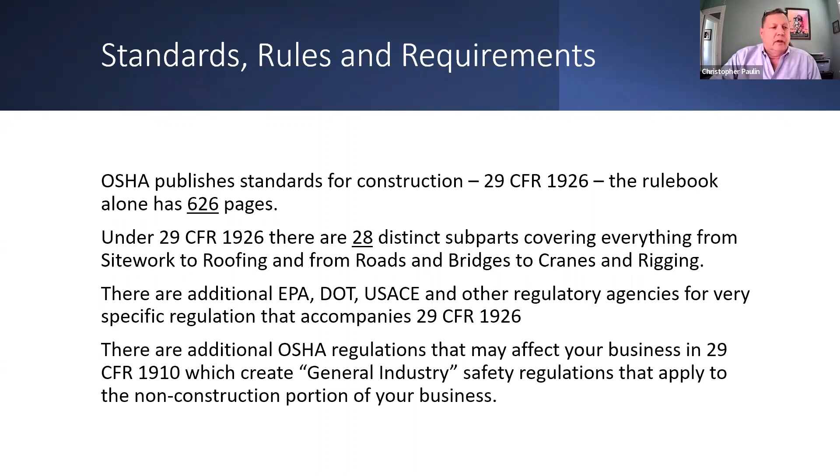Now, we need to do this because A, people die, B, you're required to do it, and C, the law is very detailed. And one of the things that people don't do well enough is document things. Now, it should be an issue to me that should stand apart because I run my own guys too. And I don't want to have to go to somebody and say, they're not coming home. Your family member isn't here.

A lot of the companies I work with have Spanish-speaking crews. And in those Spanish-speaking crews, there's a lot of family members. You find fathers and sons and uncles and cousins, and you've got entire families that work together sometimes. And this is really an important issue for the groups of people that are there.

Statistically, about 1/3 of all fatalities are in construction. I have the exact data for 2020. There were 88 roofers who died in falls in 2020, which is an off year because of COVID, and there were still 1,008 fatalities in the construction business in 2020 when everybody was off and working less than they ordinarily would have.

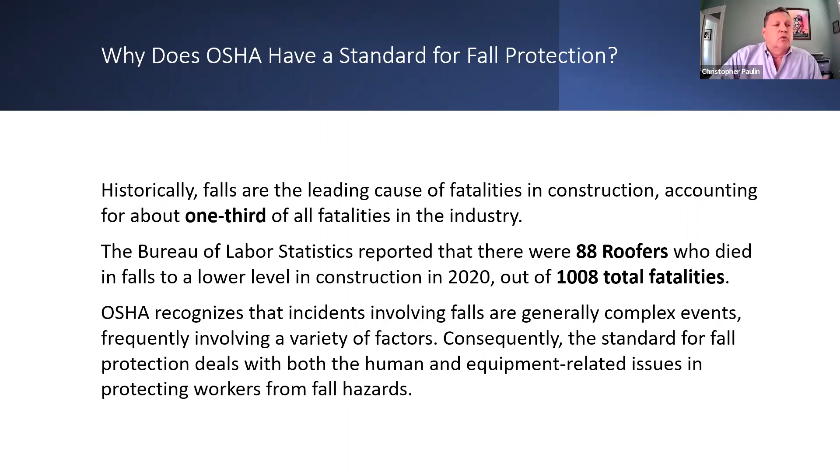Now, you have to keep records about what you do. If you're doing the things you're supposed to do and you're documenting it and something happens, you have an accident. If you're not doing the things that you're supposed to do, you're negligent. If you do it and you don't write it down, you can't prove you did it. And that kind of still makes you sort of negligent, because even though you did it, you can't prove it. And in the eyes of the attorneys and the law, if you didn't write it down, it didn't happen. So documenting things is a huge deal.

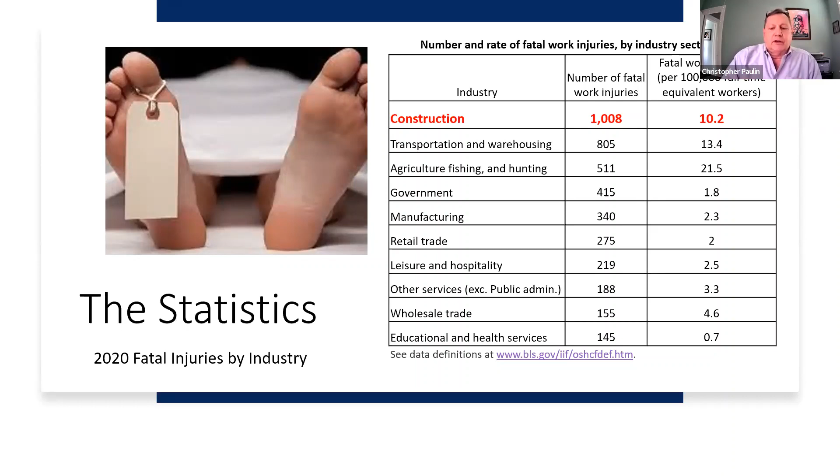Now, again, statistically, we end up with a lot of people that get hurt percentage-wise. What you see here is fatality statistics, but of all the different kinds of trades, fishermen and hunters and logging workers get hurt more than roofers. Everybody else comes after us. We have the third highest trade of all different individual trades: carpenters, farmers, miners, guys that work in road crew, you name it, police. Our guys get killed more often than anybody else.

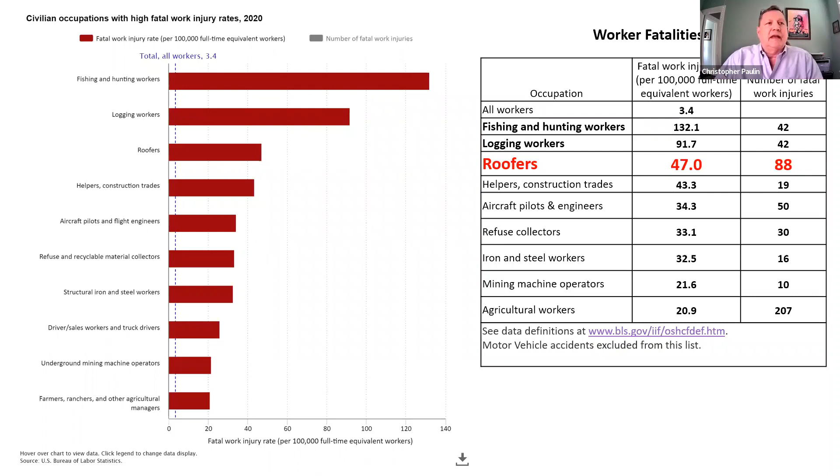I'll spend about another 2 minutes on what's most frequently cited here, and those are fall protection citations. This is from 2020 through September 2021. The number one thing that gets cited of all the things is duty to have fall protection.

That duty to have fall protection means they didn't have anything, okay? It's not like they were using it wrong or improperly. They didn't have anything at all. And you have $28 million worth of fines being issued. This is all construction industry. 1926-0501 is a construction general duty standard, okay? And everything you see here, 1926, is something that's happened in construction.

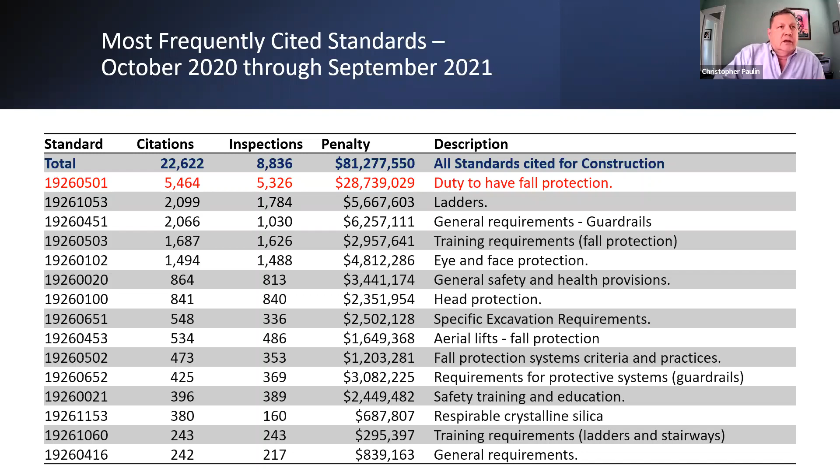So as you go down this list, and I can make the full list available to you, you find some things are general industry, but they've got some construction work in them. This is strictly construction, and this right here is the top 15 most frequently cited things, okay? You got fall protection and training in 4 of the top 15 items.

Now, subpart M applies to everything except for one thing, and that's the inspection and supervision part of our jobs. I will tell you, in 42 years, the only time I fell through a roof, I was doing a takeoff. It was a brand new job. I have seen other guys fall a couple of times in 42 years. It doesn't happen a lot, but it happens. I would tell you that just because somebody's exempt doesn't mean we shouldn't be careful about what they do, okay?

When I fell through, I only fell halfway. I stepped through the roof and I ended up to my waist. But if that roof had been compromised any more, I probably would have gone all the way through. I was lucky. So just because somebody's exempt doesn't mean we don't have to take care of them.

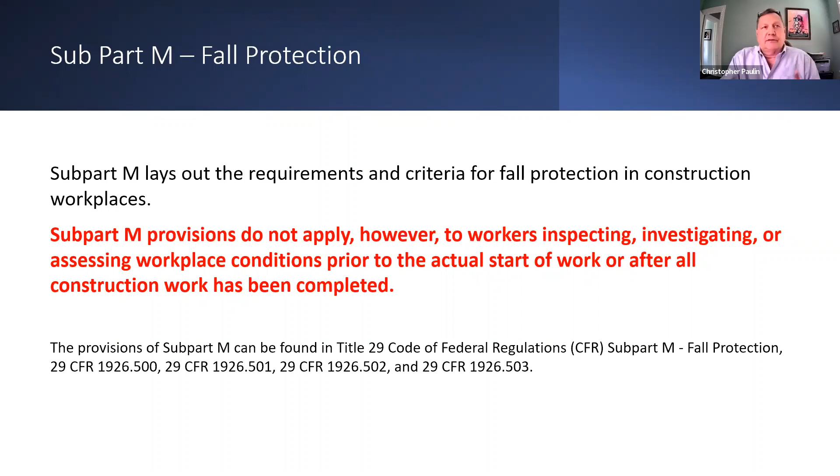Now, employers have to provide fall protection when there's any possibility of a worker falling more than 6 feet. There are other times as well when it's less than 6 feet: if you're over dangerous equipment, a fall to a lower level, or a fall on the same level. If we have a slippery surface and you fall and you land on the surface you're walking on, it's still a fall.

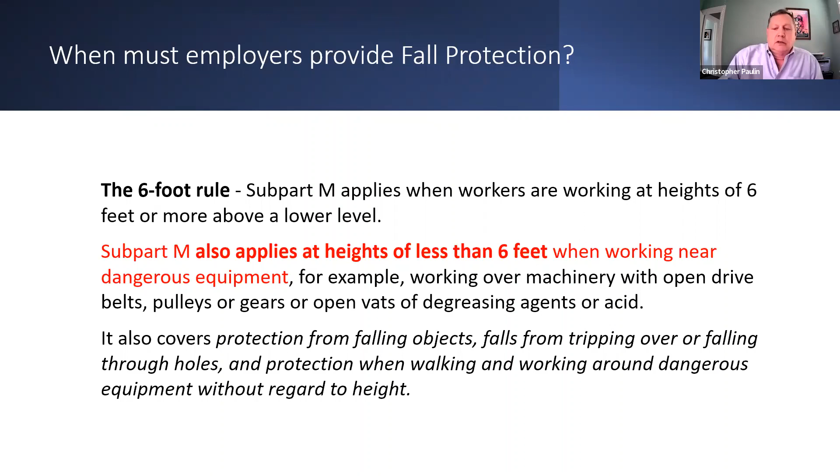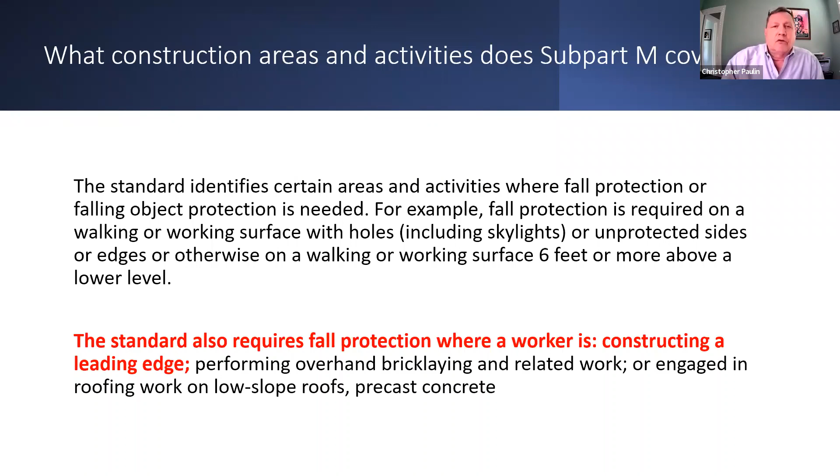Now, leading edge work seems to be the thing that most people focus on. I know that when we talk about safety as a roofer, everybody thinks about the leading edge. What I want to do is spend a few minutes talking about the stuff that we don't really talk about that we should. First, you've got these types of falls: falls from the same level, and falls at an elevation.

When a person falls, they lose their balance. The body unintentionally moves from upright to horizontal. The free fall velocity when somebody falls 12 feet is equal to that of 20 miles an hour. And a person hits the ground in less than 1 second from 12 feet of distance. You fall 12 feet in less than a second, and realistically, you don't even have time to react.

So falls are dangerous because when you look at the total distance that a person is going to fall, or a person is going to get rescued by fall prevention equipment, there's still an impact associated with the fall. Even a person that's caught by a harness like this still receives the impact of the harness hitting his body.

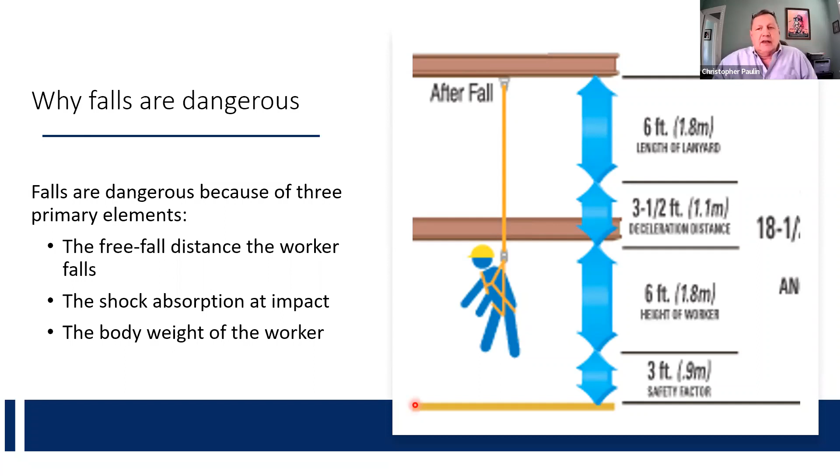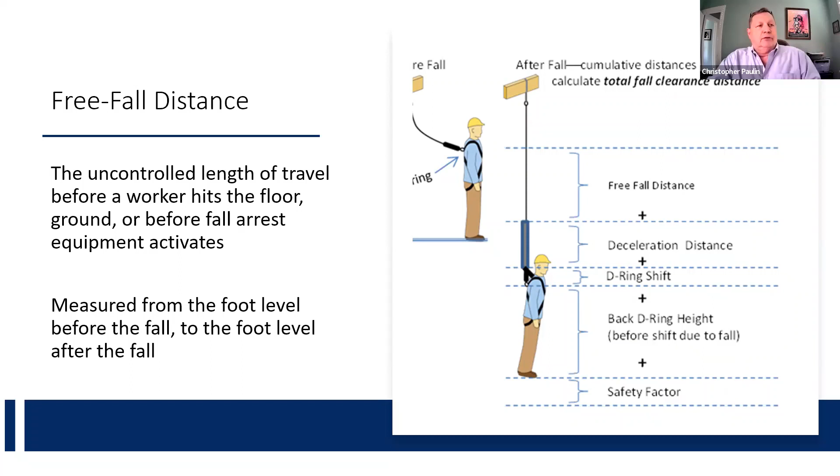Now, the first thing is when we think about falls, we need to think about the distance that somebody's going to fall. This is always measured from foot level before the fall to foot level after the fall. You're not allowed to fall more than 6 feet, and really, 6 feet can kill you.

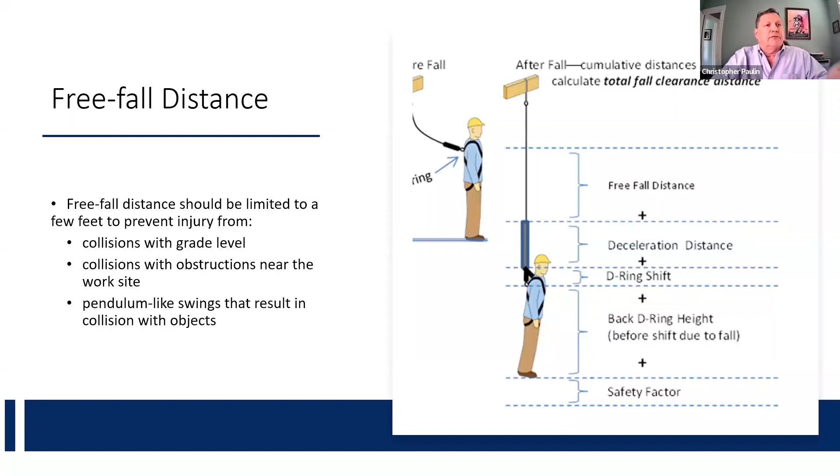A lot of people that die in falls die from falls at lower levels, not 30, 40, 50 feet in the air. They die from falls off of ladders. So it's not just leading edge work. You can fall off of or through a lot of different things.

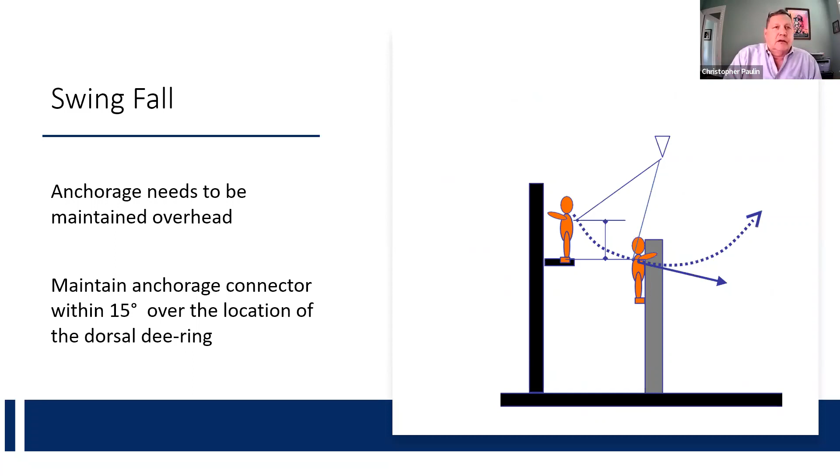And the other part to be aware of is swing fall. When you go over something, you can go straight down and have plenty of room. But if you swing or oscillate from side to side and you hit the wall or hit a beam or something else, you hit that just as hard as if you had hit the ground. So we look at shock absorption at impact.

One of the things that I do see is that anchorages, lanyards, and harnesses are not always fit correctly. The harness is too loose, the D-ring's in the wrong spot, the anchor is in the wrong place, and the guy can fall more than 6 feet before his fall is arrested.

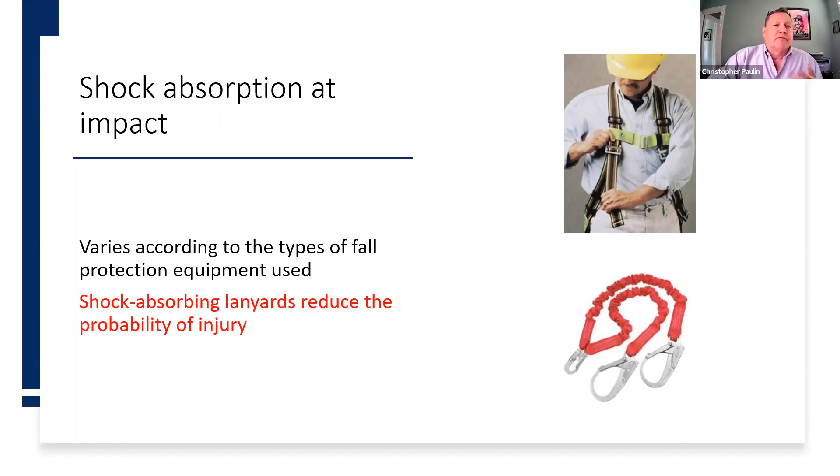And the most important and frequent thing is this: the body weight of the worker. The bigger they are, the harder they fall. And the bigger they are, the harder it is to get a harness that fits them, because you can't go buy compliance in a can and get a harness that fits a real big guy.

And if they're wearing an overcoat or something, clothing for colder weather, all that stuff has to be taken into account.

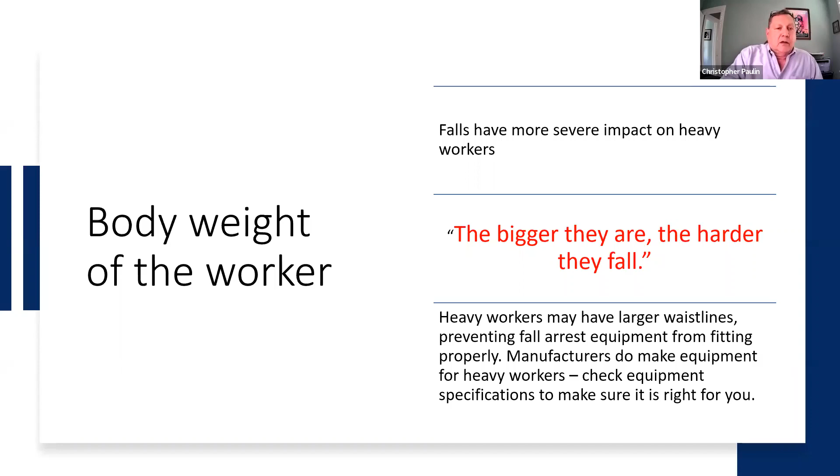But the single most important thing that I deal with, with companies that I run into, that I work for, that I interact with, is this: fallen worker rescue. The employer shall provide for prompt rescue of employees in the event of a fall, or shall assure that employees are able to rescue themselves. That's one of the standards. So you have to be able to create a plan that permits you to rescue a guy in really 5 minutes or less.

I'm going to explain this part, because usually I talk about this towards the end of these presentations, but we only have an hour here. So I've rearranged this part to put it towards the beginning, because I don't think it gets enough emphasis.

Everybody knows you got to have a fall protection plan. We all know you got to put up a warning line, have a safety monitor, wear the harness, put up a guardrail. We all know this. If we don't do it, shame on us because we know this. Every time I do a fall prevention class, I have to make sure that I dedicate enough time to this part of what happens after a fall.

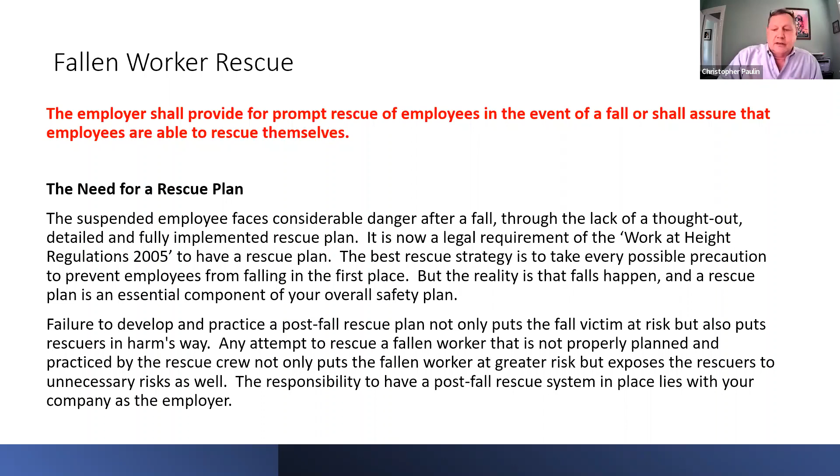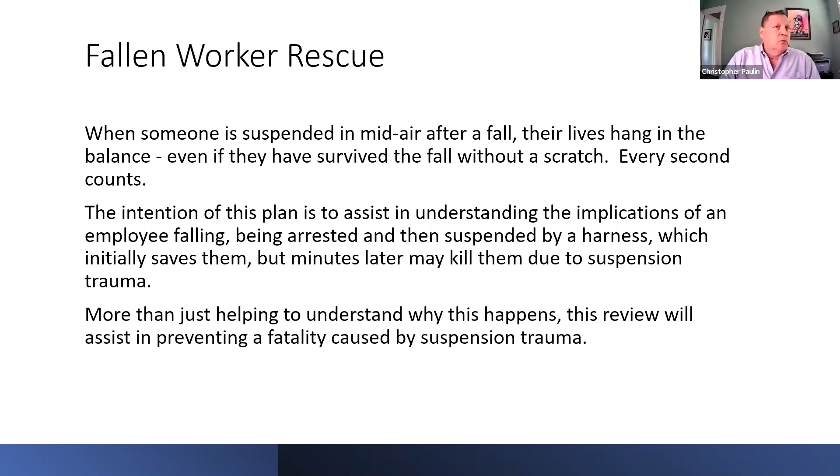If you've got a guy that falls off a roof and he's wearing a harness, he's only got a short period of time before he gets seriously injured. When someone is suspended in midair, the harness restricts the flow of blood in their body. The intention of creating a fallen worker rescue plan is to make sure you can get the guy out of the harness and onto the ground in a reasonable amount of time, which means about 5 minutes.

When we look at fallen worker rescue, there are critical phases: before the fall, when the fall is actually arrested, the suspension part of the guy hanging there, and then the rescue part of the rest of us getting him out of the harness and onto the ground.

Before the fall, what can you do to prevent a fall-related accident? If you've got your guys in harnesses, you can almost always rig those harnesses, that system, for fall restraint rather than fall arrest. You don't have to let them go over the edge, and there's really no reason to do that. Now, there may be instances where you can't find an anchor for the lifeline that permits you to rig fall restraint and reach everything you need to reach. If that's the case, then we need to look for other kinds of anchors, or we have to consider what happens if the guy falls.

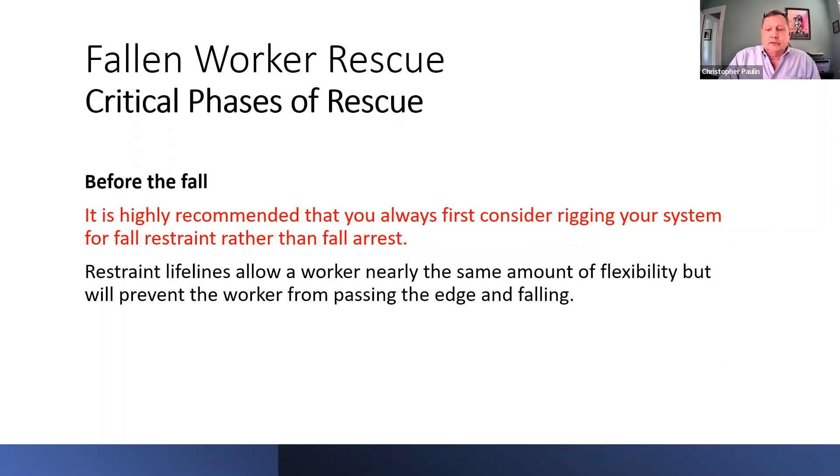A restraint lifeline is infinitely better than a fall arrest lifeline, because the things that happen when a guy falls are surprisingly serious. The whole concept of fall protection is that if you do fall, the system is going to stop you. How that happens really depends upon the way the harness fits, where the attachment point to the harness, to the lanyard and the lifeline is relative to your body. If your harness is too loose and the attachment point is down low in the middle of your back, you can get seriously hurt because of that.

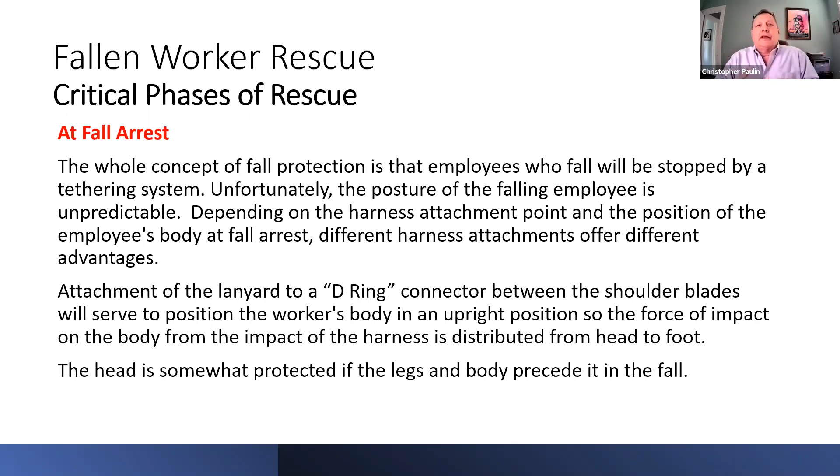And we see guys loosen up their harnesses because it's hot, it's a little uncomfortable to work with. They just have to get used to it if they're going to wear a harness. And where the anchor point actually is matters, because if you're moving along the leading edge of a roof, your position relative to your anchor will determine how much you're able to fall in free fall if you're not very careful about the positioning of your anchor and the length of your lifeline.

Now, the second and most critical issue here is suspension. We assume that when somebody falls and that fall is arrested, you've just saved the guy's life. And realistically, that's not necessarily the case, and we're going to explain why. If you can't get that guy out of the harness, then that guy will suffer what's called suspension trauma. We'll talk about suspension trauma in a minute here, but fall victims have to be aware that they need to do some things if they're hanging there in the harness.

One of the things they need to do if they're hanging in the harness is keep their legs moving. Nobody tells them that. I don't know how many fall classes I taught before I figured out I was supposed to start telling people some of these additional things, like what happens after you fall. I got relied on to say, this is the rule, always keep your harness on, make sure you're anchored. That was the emphasis. And really the emphasis needs to be equally on this part as well.

If a guy falls and he's hanging there in a harness, he has to keep his legs moving. Because if he doesn't keep his legs moving, blood will pool into his legs and not get up to his head. And that's what they call suspension trauma.

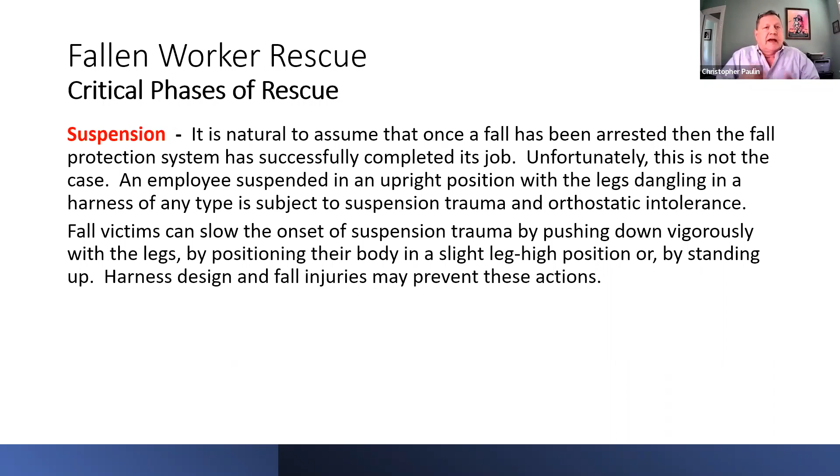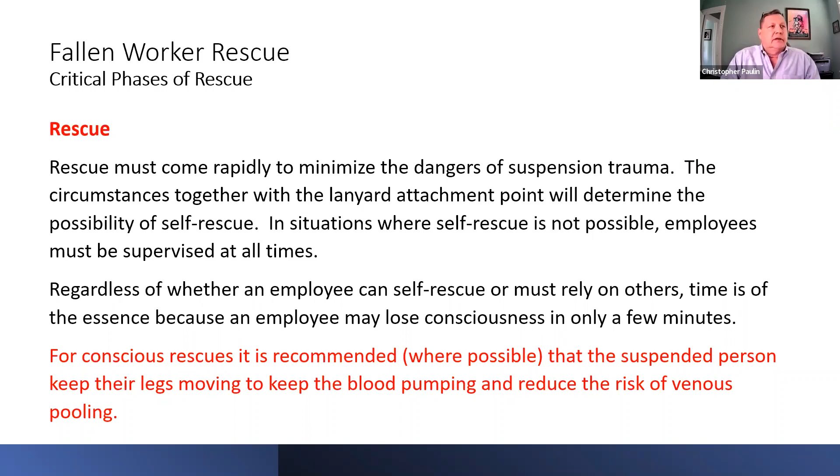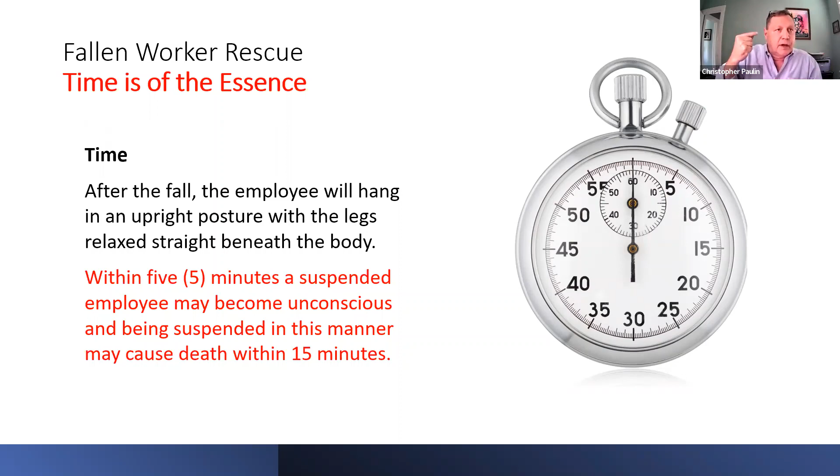Now, the last phase is the rescue phase. It has to come quick enough, because if a guy can't rescue himself, this suspension trauma is going to begin to affect him. Time is of the essence for this. When an employee is suspended, he can lose consciousness in about 5 or 6 minutes. And if he loses consciousness, he can die within 15 because of lack of blood to the brain. That's called orthostatic intolerance.

Most of the guys, and this is from an OSHA publication, most of the guys that use harnesses are unaware of what suspension trauma is. Some guys know. Most of the guys in bigger companies with safety departments that pay attention, guys like you, will tell your folks about suspension trauma. But you also have to tell them things like, you've got to keep your legs moving.

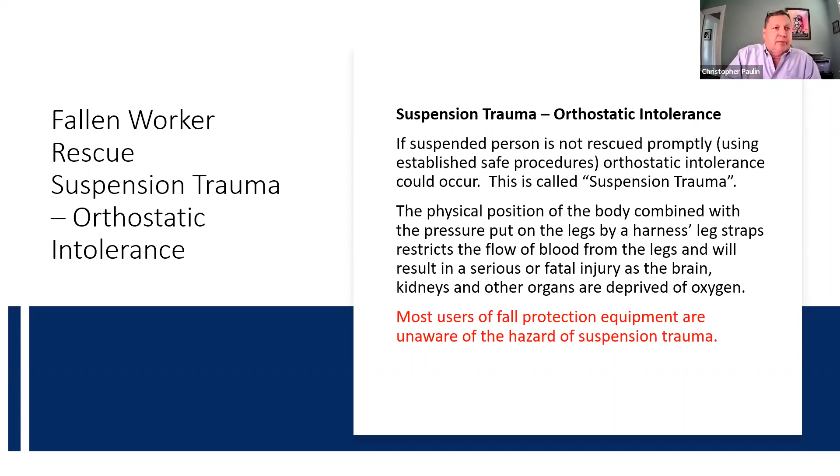When you're hanging in a harness, that harness is putting pressure on the legs across your femoral artery, and it's preventing blood from returning to the level of your heart and circulating up to your brain and back around. Orthostatic intolerance is really the technical name for the part of this fall that's going to kill you. If you don't die on impact, you can still die from lack of blood to the brain.

Now, the way it happens is this, it's called venous pooling. Blood will collect in the legs, not make it back up to the brain. And when that happens, it causes a person to faint. Now, if you were not in a harness, you would fall over. And your blood would be able to circulate back to your head because you would be horizontal, not vertical.

But the problem is when you're in a harness, the harness holds you vertically. It keeps you from falling over. And when you can't fall over, the blood doesn't circulate back up to your brain. So this venous pooling part is hugely important, because once a guy is passed out, there's nothing he can do to help himself. He's going to stay passed out until somebody gets him down and out of the harness, and he's only got about 5 minutes before that happens.

People don't believe this, but I have not read any piece of literature that says anything different. They all say the same thing. Whatever study there is, it refers to a time limit maximum of 5 or 6 minutes. After that, you've got to pretty much consider the person useless. He won't be able to help rescue himself, and you need to make sure it's a fully assisted rescue.

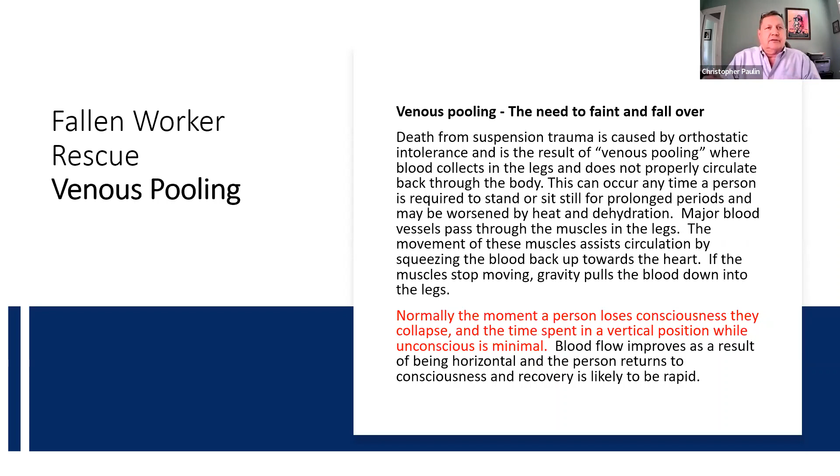If he's fallen over, passed out, he's going to be hanging there, there's no self-rescue associated with it. There are self-rescue and aided rescue things that a guy can do. I have not fallen 6 feet, and I have not physically hit a harness like that myself. So I don't know what it feels like. But I can imagine...

That when you say to a guy, you've fallen 6 feet, now get yourself back up on the roof, that might be okay for a guy that's 20 years old. If you're looking at a guy that's 45 or 50 years old, that's going to be an issue no matter what. I was in pretty good shape 15, 20 years ago, and I still think I would have had a hard time trying to climb back up onto the roof. Because that self-rescue part is either you climb up a rescue ladder or you climb down a rescue ladder. Really, how's that going to happen?

The older you are, the harder it's going to get. The bigger you are, the harder the impact. It just so happens that getting older and getting bigger are two things that happen together quite a lot. I happen to be much larger now than I was 20, 25 years ago.

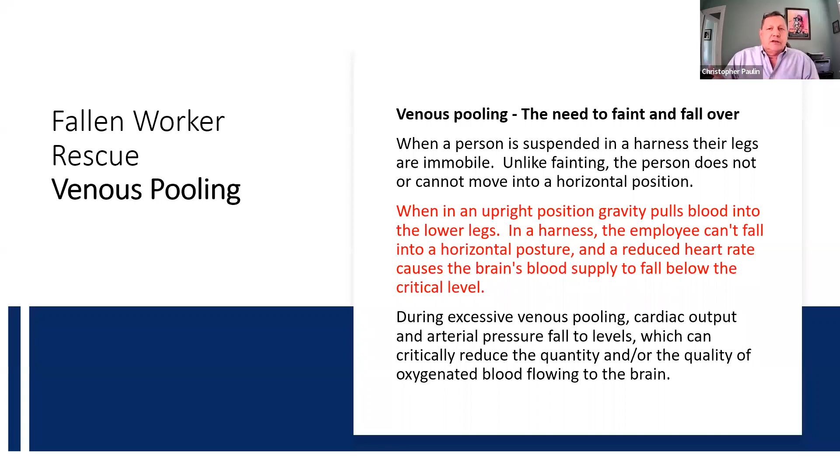Because your body changes, your musculature changes, your ability to resist things, your heart, all that stuff, it all changes. Now, venous pooling is an issue. There's three things that aggravate the problem. One, the employee's suspended upright. He can't fall over, the blood won't go back to his head. The second thing is the safety harness straps exert pressure on the femoral arteries by compressing them and reducing the blood flow back to the heart. And then the third part is the harness keeps you upright.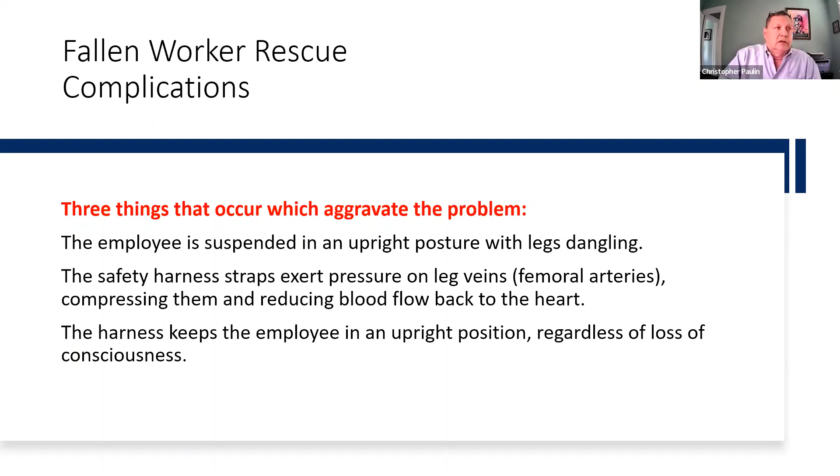So if you can't recover from this, you can't recover at all. Now, there are some recommended practices here. OSHA recommends you rescue suspended workers as quickly as possible. There's only going to be one way that happens. You have to have a plan, and your people have to know what to do. And that generally requires some practice.

Now, I do safety work for the Army Corps of Engineers. I'm an SSHO, Site Safety and Health Officer. You have to demonstrate on occasion to their safety officers that you have these systems and that your people know how to use them. So the plan has to be in writing, the people have to know what their individual jobs are. Like who goes over to get the safety pole to grab the guy's D-ring, who goes to try and find the bucket lift truck or whatever it is that you're going to use, whatever your plan has to be.

You can't just make this up. If a guy falls off the roof and the rest of your crew's up there thinking, well, now what are we going to do? That's a first-class problem. Especially if the one guy that falls over the edge of the roof is the one guy on a roof with a brain. If he's the man in charge, and the man in charge is the one that's hanging over the edge of the roof, then the rest of the guys need to know what to do. They need to know where the equipment is, who's going to be responsible for what, who's going to go call 911, all those things.

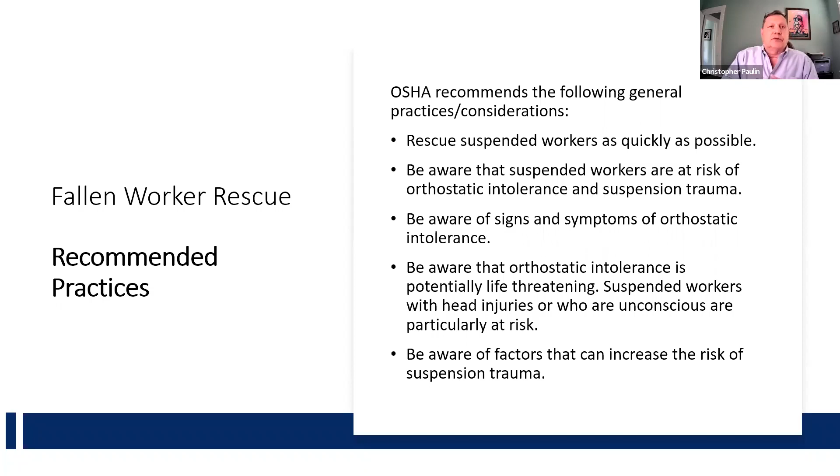Guys don't realize it. The next thing they need to do is lift his legs. So there's this basic instruction part that has to come along with every fallen worker rescue plan that tells the guys that are in the field working what they have to do if somebody falls. And that first aid part is probably the most important thing. If they don't know what they're supposed to do, there's no way that it's going to get done.

Now, if self-rescue is impossible, this is important. Procedure number 1 is the guy that's hanging there has to pump his legs frequently to try and keep the muscles and the blood flowing. If you got one of those little step straps that you can step in, you still need to keep your legs moving to keep your blood flowing. And somebody got to be on the roof yelling at him, telling him to keep doing it. If the guy hits his head on the way down when he falls, he might not be able to do that at all. So you have to be able to help the guy from the roof, not just physically, but mentally as well.

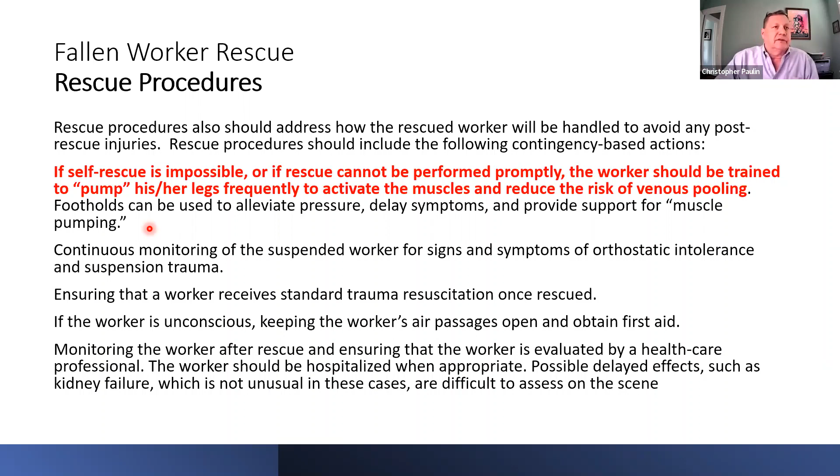Now, if the worker's unconscious, you want to make sure that you get his airway open, that you've called 911. That should be somebody's job right off the bat. That you get his legs moving and you try and make sure that he stays alive until a rescuer gets there. There's 4 types of rescue. There's self-rescue.

There's mechanically aided assisted rescue, where they either haul you up or let you down. Then there's mechanically aided rescue for an unconscious victim. And then there's the kind of rescue which is also assisted, where you'd be able to use an aerial lift of some type.

The assisted rescue methods, number 2 and number 3, are probably more consistently available on projects. But if you're going to use a system like a leading edge Raptor cart or a Cobra cart, it's got a cable winch system that you would attach to the guy and haul him up or let him down. You've got to get that extra snap hook onto the D-ring of his harness.

So there's a whole process there that requires a little bit of practice, because it's not the easiest thing to do. To set up that rescue system, people have to know how to use it, how to connect it correctly, and how to make it work. They bring them up, they bring them down. And if you're trying to bring them up, it's a hand winch, so it's not the easiest thing to do.

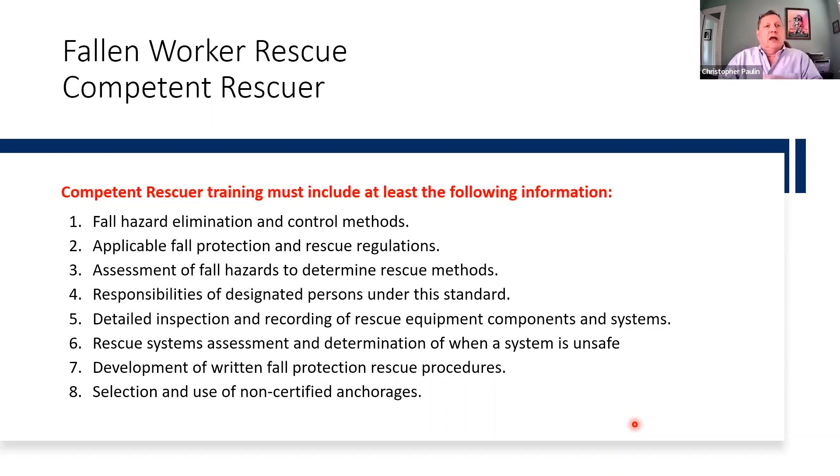If you don't have a qualified person available, a competent person needs to select and use a non-certified anchor. A regular competent man for fall prevention isn't qualified to put up an anchor. I actually have this a little further on with the specific standards that reference it. So somebody's got to select an anchor, somebody's got to select the way to hook the guys that are going to rescue them, and then you've got to have this entire plan to get the person onto the ground.

The competent person has to be qualified in controlled access zones, guardrails, personal fall arrest systems, safety nets, warning lines, safety monitoring, any system that's going to be used. So the rescuer has to be as competent, really, as a competent man for fall prevention. A competent person for fall prevention that's not trained in rescue isn't qualified to rescue people.

They have to have the training. If they don't have the training, they're fine to set the systems up, but you need the person properly prepared to make the correct choices if somebody falls.

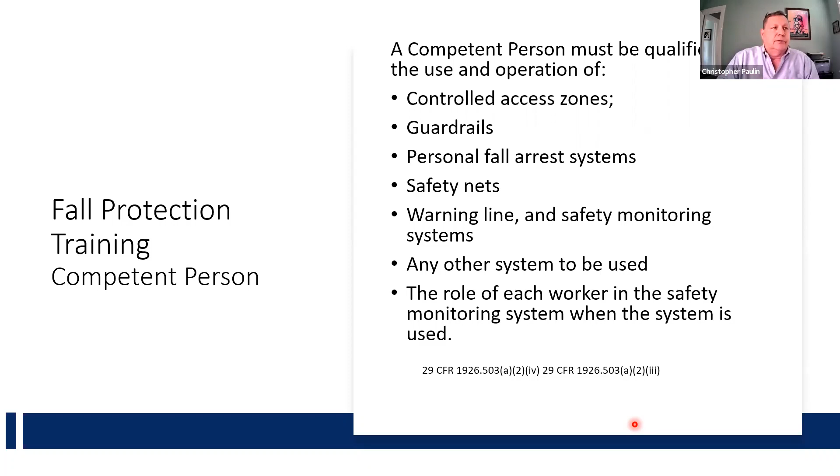Now, you have to train competent people. You also have to train roofing workers, okay? There is training requirements for fall protection systems. Each person needs to be trained by a competent person.

That means, I've even heard attorneys say, well, the employer can just say this person's a competent person. I know my attorney says you better have something in writing to back that up, okay? And that's a big deal, because you can't just go say, okay, my foreman's a competent person. He's been doing this for 20 years. What kind of training has he had? Does he know all these different kinds of anchorages and conditions, et cetera? All the irregularities and the variations in the rules. I mean, there's a lot of stuff to know as a competent person.

All training of individuals on a roof needs to be done by somebody who's qualified. I would tell you that when I became an OSHA instructor, I passed a 500 level class. That did not qualify me to be a competent person for fall prevention.

I had to take extra training, and I've worked with fall equipment for over a decade. I worked for a company that manufactured it as well, the Panther Equipment Company out of Missouri. They had fall protection carts, guardrail, all that stuff. And I've worked with this. I've been factory trained with things. And I still had to take an extra class to qualify me to do this.

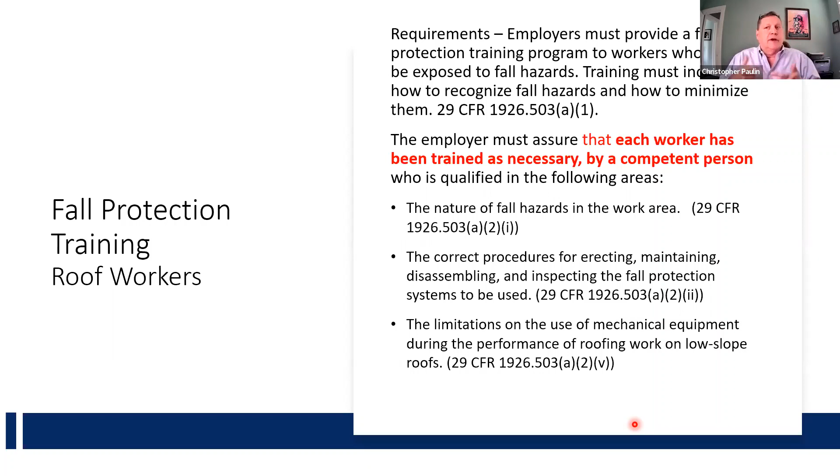Retraining, obviously, occurs when the systems change or somebody demonstrates that they don't understand what they should be doing.

Now, I guess if falls don't happen every day, how does somebody show evidence to you that they need to be trained in rescue? I guess that only happens after somebody falls and the rescuer fails to rescue them. So fallen worker rescue training ought to be something that's scheduled once every 12 months. Every new guy that comes into the company ought to go through, once annual training of, how the rescue equipment works and what they're supposed to do.

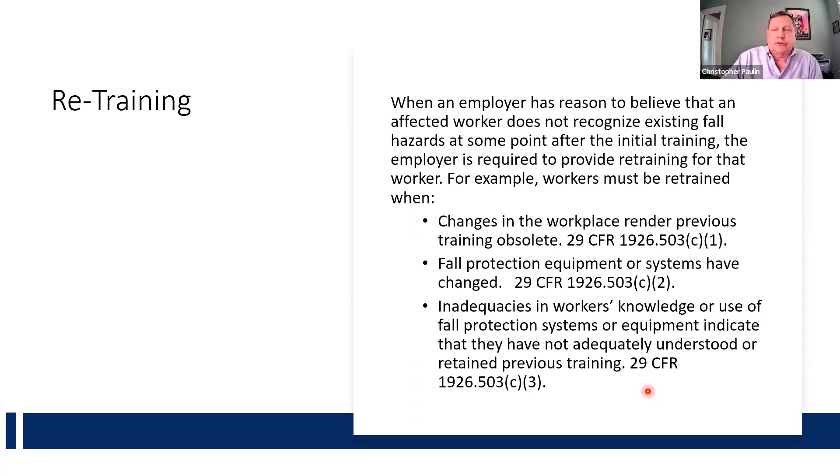All training must be verified, okay? You have to keep a written record of training. 29 CFR 1926.503 says verification of training. That applies to everybody. It's not just that they got fall prevention awareness training. If you have a competent man, you have to document what makes him a competent man.

I swear to God, okay? We get people that don't seem to understand, yeah, an employer can designate a competent person, but he's got to have the paperwork to support it.

Now, there's a lot of different fall prevention standards. Are there any questions about the need for fallen worker rescue programs? Okay.

Usually I talk about fall prevention standards before I talk about fallen worker rescue, but I know we're going to be time limited and I really only have like 15 minutes, so I want to go through a couple of quick things.

An employer has a responsibility. The first thing he is responsible for is making sure the roof deck is strong enough to support not just the people on it, but the weight of all the materials he's going to put on there. If you're tearing off and piling stuff on one side of the roof, you're talking about the maximum weight, live load, not dead load, that you're putting on the structure. So you have to do some kind of evaluation, and you have to document this.

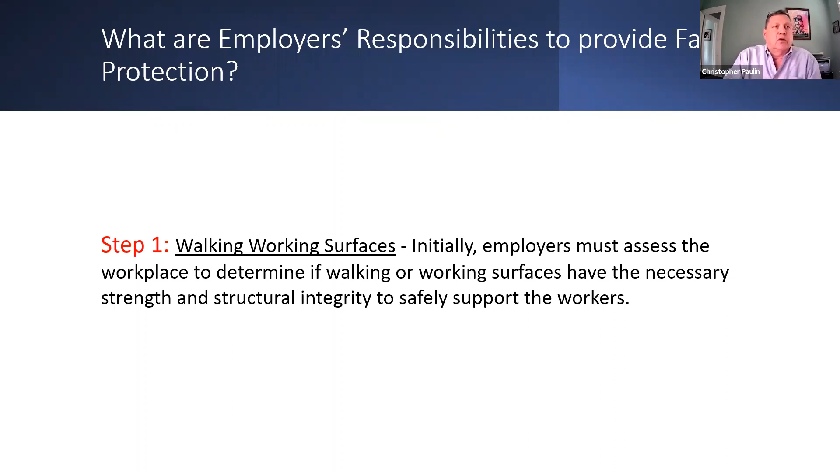You walk through the building on the underside, look at the deck, and say the deck looks like it's in good condition. From the underside, you need to core cut and make sure it's not totally rotten from the top down. That way you can say you've verified the walking working surfaces appear to be in good condition. That doesn't mean you won't make a mistake, or there's not a little rust spot on one side where you didn't cut. You can only do so many core cuts on a roof, right? But you do have to make some kind of effort with respect to due diligence.

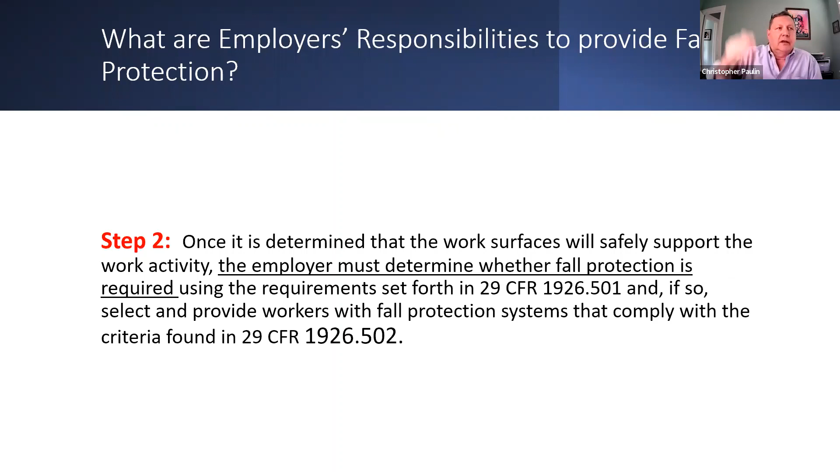Once you've determined the deck is safe to walk on, the employer must determine whether fall protection is required. That's the whole decision tree about what you're going to do. What kind of fall prevention systems should you use? Most of us default directly to a warning line and a safety monitor. Why? Because it's the least expensive.

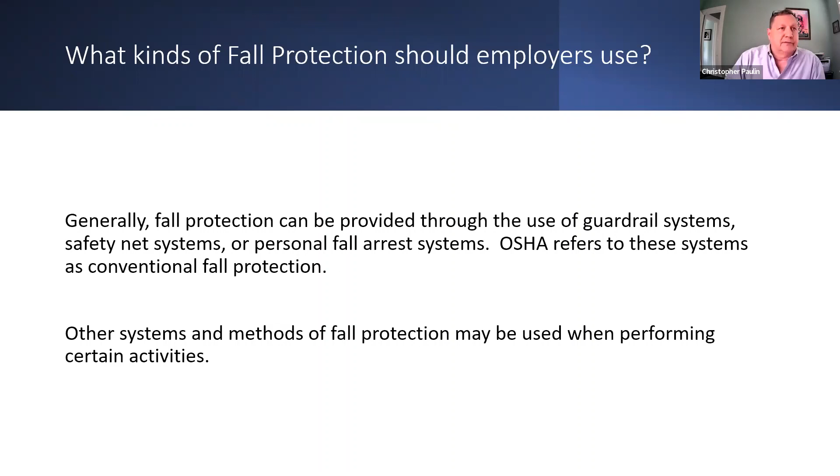Really what you need to do is for each project, have a fall protection plan prepared by a qualified person and developed specifically for each site. Now that's a regulation, one of the standards: 29 CFR 1926.502(k)(1). It says exactly that, copied and pasted. A fall protection plan must be prepared by a qualified person. Basically that's somebody who can do the mathematics and knows all the things they're supposed to know about the structures of the building to make sure the anchorages are correct.

If you default to a warning line just because that's what you always do, then 97, 98% of the time that's going to be just fine. It's that small percentage of the time where it's not really adequate that gets people into trouble. Over 1,000 workers a year die in construction work. Why? Because we're not looking at the hierarchy of controls. We're defaulting to the least expensive, easiest method to use, and we tend to downplay fall prevention in favor of production.

I spent years working for a fairly large union shop out of New York City. I know exactly what the mentality is like.

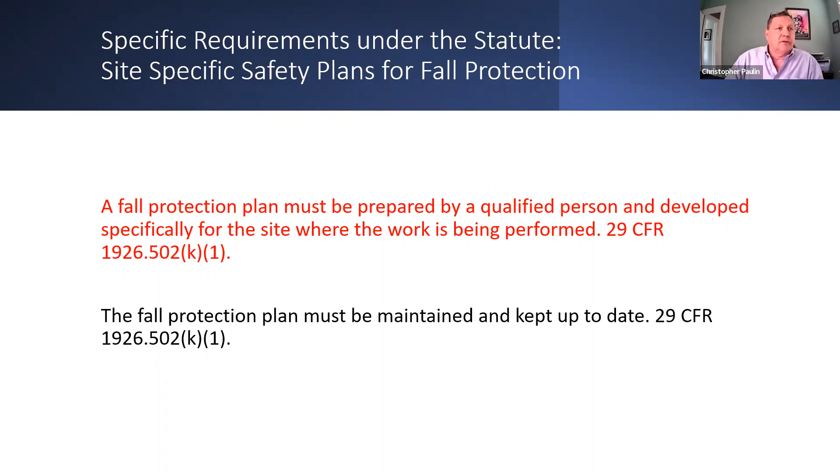Now the fall prevention plan must be maintained, kept up to date. If there's any changes on your project, you have to change the plan. Any changes to the plan have to be approved by a qualified person. That's 29 CFR 1926.502(k)(2), a standard. So if you've got to change the plan, a qualified person needs to sign off on it.

And once the plan changes, a competent person has to supervise the implementation of the plan. That's 29 CFR 1926.502(k)(4). So you're required to have a competent person on every job. Who's that going to be? Could be the owner of the company, safety manager, a foreman. But if you look at the definition of what a competent person is, it's somebody who can recognize a hazard and has the authority to make the corrections and the changes.

You've got to have somebody who can recognize a hazard at any point in time. That probably ought to be a foreman who's there in charge of the job on a everyday, full-time basis. Because if something happens and there's no competent person there, how's somebody else going to make the change or the correction?

So you really need to consider where competent people are and what their responsibilities are, and what, as owners of companies, our responsibilities are, not just to the people on the roof, but to the owners of the company as well. Because if you don't have a competent person and nobody makes a change to something that's deficient and somebody gets hurt, it puts your company back at risk. The whole reason for doing this is to protect the people and protect the businesses that are investing in this.

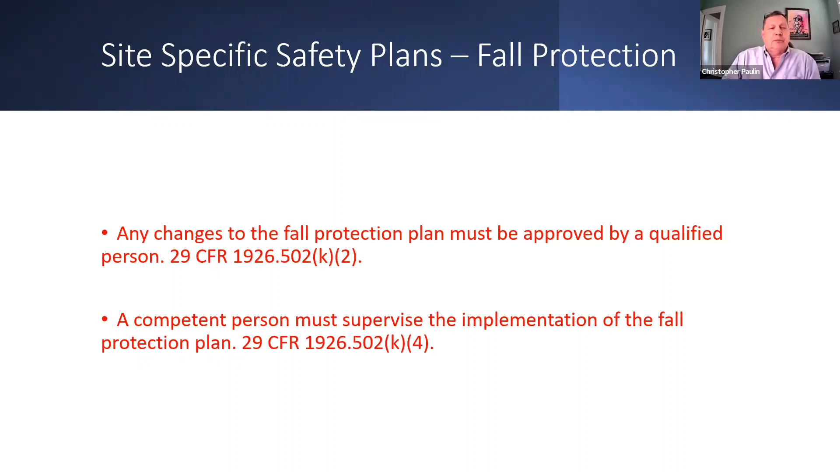Your company has a lot of value. People put their souls into these companies, and we want to see you keep them. So employers must provide fall protection training.

That has to be done by a competent person. We have the standard for it, okay? All these things tie together. And if your regular old safety guy can't come to you and prove that he's competent, then you need another safety guy, or you need to look for somebody qualified to do those specific things you require. You don't have to get rid of the guy, you just have to recognize what his limitations are.

Now, a competent person for fall prevention has to be qualified in the following areas: the nature of fall hazards, so it's a hazard recognition process, and the correct procedures for erecting, maintaining, disassembling, and inspecting the systems. So you have hazard recognition and hazard controls.

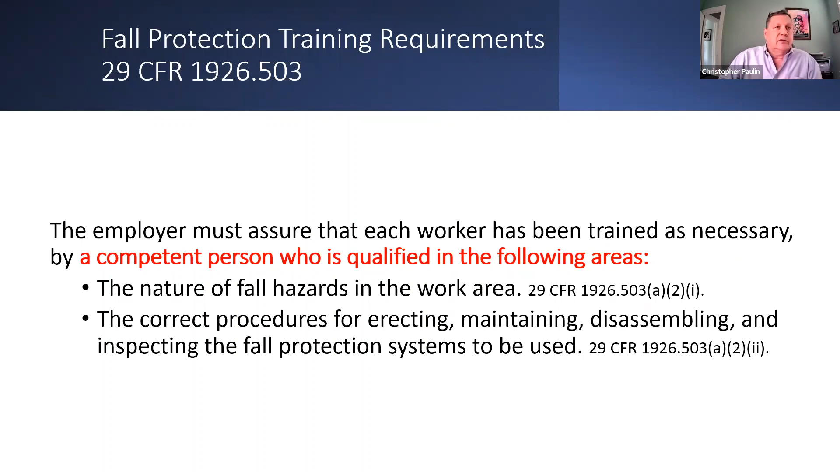If the default method is always a warning line and a safety monitor, then you have to make sure that even those warning lines comply with the rules. They're not supposed to sag, for example. There's a breaking strength to a warning line, there are rules about that. So even the little things, those are the things that are going to catch you.

With every trade except for roofing, controlled access zones, guardrails, personal fall arrests, and safety nets are required. Only for roofers do they permit warning lines and safety monitoring systems. So we're the exception to the rule. Anybody else up on your job has to follow different rules.

The way I understood this, and when I went to ask my lawyer, that means if an HVAC contractor comes on a job and he's outside the warning line, you better put a harness on him. He can't work with your safety monitor because it's only for the roofing crew. Now, it's one of those things where I think my lawyer's a little tight, and I guess, you know, it is what it is, but that was his interpretation.

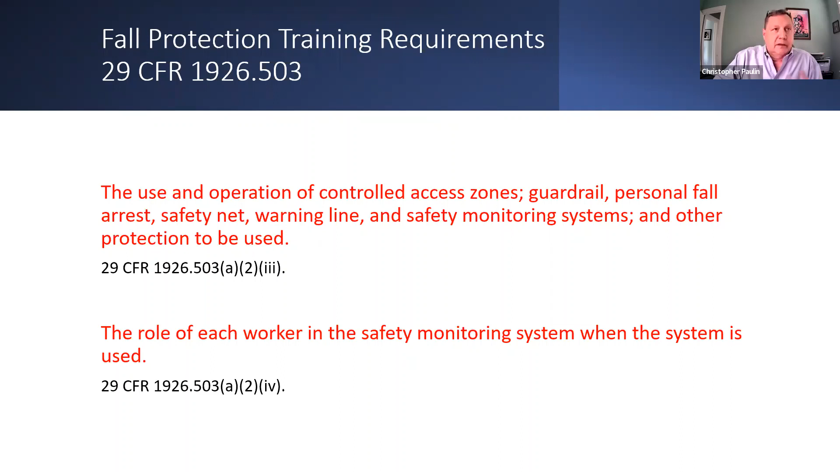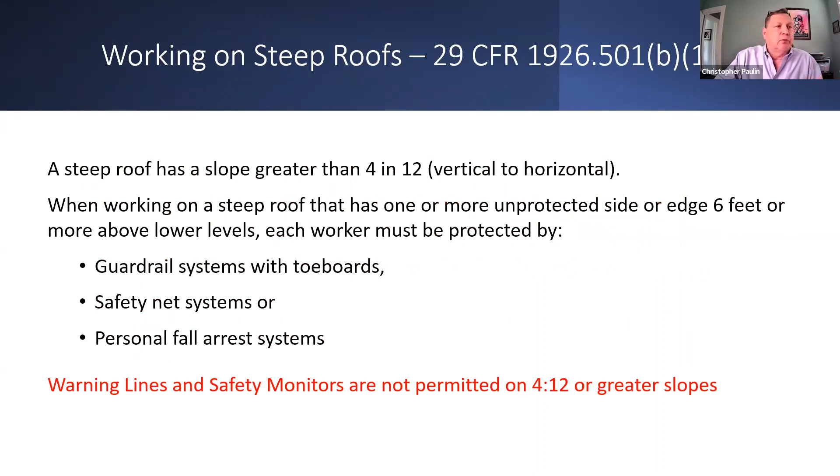Each worker in the safety monitoring system, if you're using a safety monitor, has a role. What I've done is I've highlighted some of these things that are important in red, and we're not going to have time to finish all this, so I want to skip to a couple of things, okay?

Your safety monitor must be a competent person. The statute that says that is 1926.502(h)(1). You're required to have a competent person as a safety monitor. That means he has to be trained in the recognition of fall hazards. If you have a guy up there as a safety monitor on a job and he hasn't been trained in the recognition of fall hazards, well, A, what good is he? B, he doesn't comply with the law.

And, you know, C, you've got to consider as a company how that affects you. It's simple to give the guy a 30-minute class in hazard recognition, put a letter in the file, in his personnel folder or in your safety files, that says he's qualified as a competent person to work as a safety monitor.

Now, I work with a couple of contractors that use safety monitors all the time, and basically they rotate their crews. If you've got 3 guys working near the edge of the roof and 5 guys towards the center, they'll bring one of the guys from the center in to work as a safety monitor for the other 3, and it's kind of a fungible position. You can interchange these guys as long as there's something in their file that says every one of them has been trained in hazard recognition.

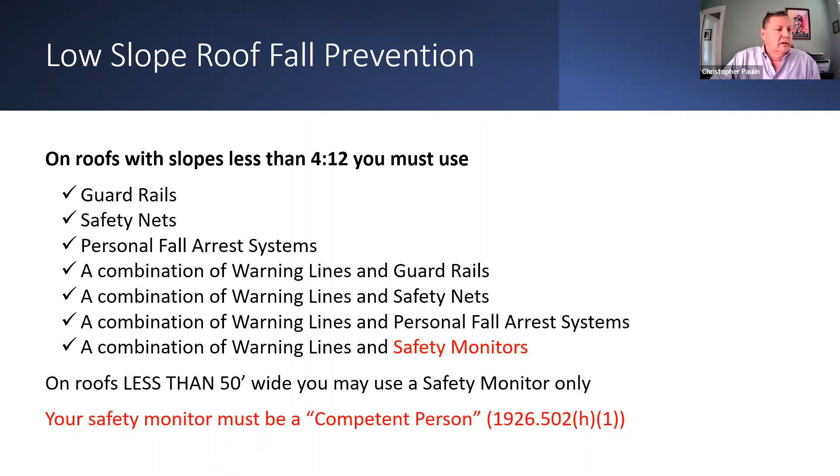That way you can at least cross the T's, dot the I's, and take that and put it away. Not one of the things you need to focus on.

Lifelines, in particular horizontal lifelines, and guardrail systems. All these things need to be tested and approved, technically by a qualified person, which is an engineer, with certification. If you go to 3M or Honeywell and buy a pre-engineered lifeline, it comes with a certificate of compliance. If you go to Leading Edge or Garlock and buy a turbo rail system, you request a certificate of compliance, their engineers will write a certificate that says this system complies. Probably easier to get that up front than it is to go digging for it afterwards.

There are a couple of tier 2, tier 3 manufacturers of roofing systems that cheat. They say they have it, but they don't really. When you go to investigate them, it looks like it's less expensive because it is, because it may not really comply. You've got to be real careful with that, because if it doesn't comply and you have a fatality on a job, you've got people looking at everything.

One of the clients I worked for was Whiting Turner out of Washington, D.C. They had 5 people die in 1 year in 5 separate accidents. They had independent engineers on their job every day for 2 months after every fatality. And it was stupid stuff - a guy stepping through a hole on the same day they had a toolbox talk about covering up holes.

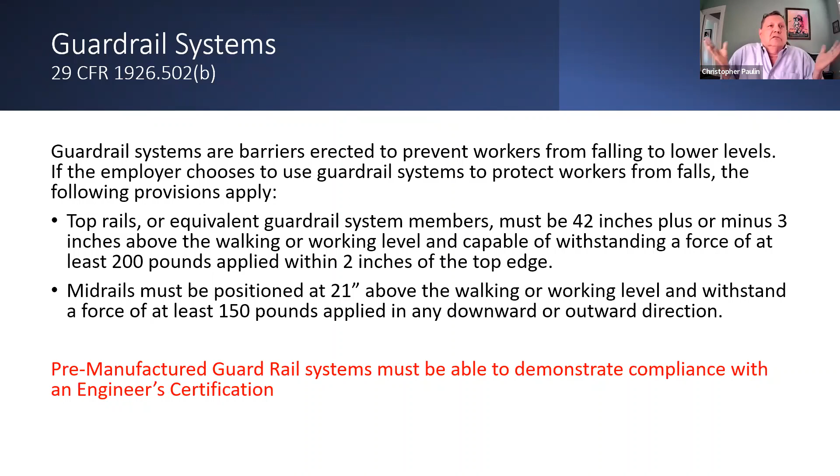I worked for Firestone for 11 years. 6 of those were in Mexico, and it took me 2 years to figure out nobody understood what I was talking about. I had to speak fully in Spanish. I had no choice. But they would all go, yeah, and I'd go, what happened? And you get this - they don't know. So basically, those are the kinds of things that are important here.

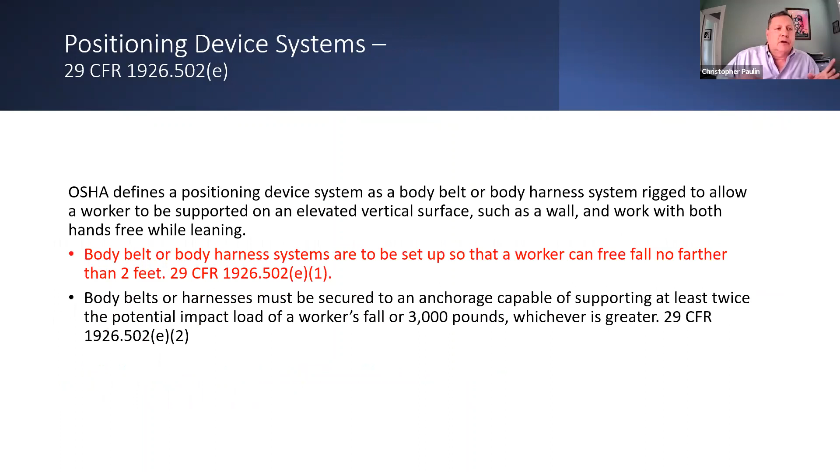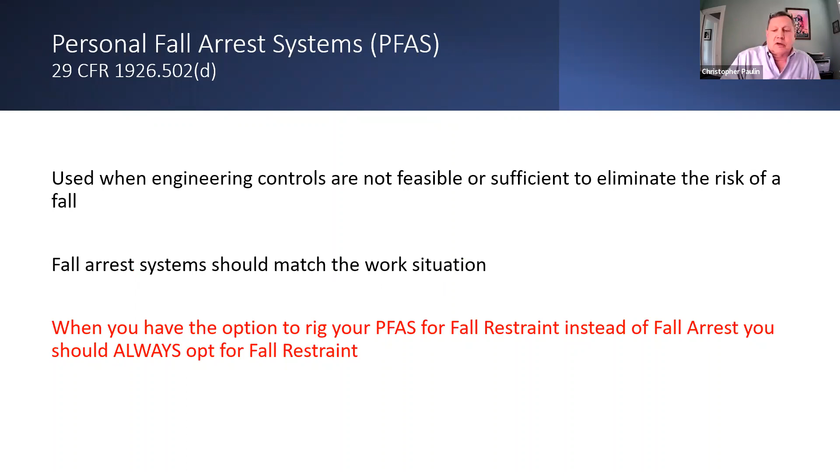I've highlighted stuff in red. This presentation is available to anybody that wants it. I also have a hazard recognition presentation - if you want it, just let Morgan know and I'll send it out to you. The things we've noted in red, you may not see them here, but in the speaker's notes below, I have the specific regulations that whatever's highlighted in red refers to.

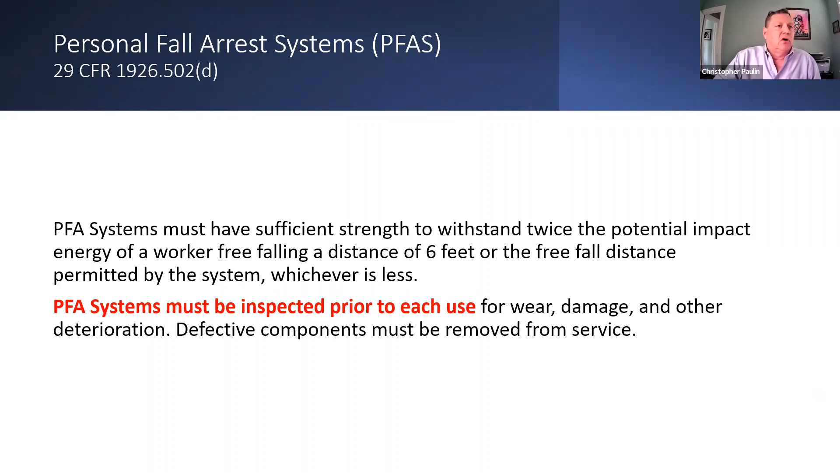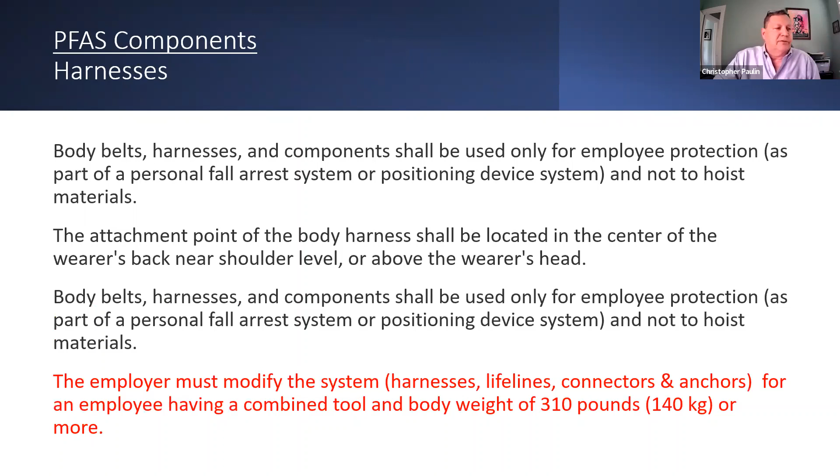It says here, personal fall arrest systems must be inspected prior to each use - that's 1926.502 D16V. If it says they have to be inspected before each use, somebody's got to write something down. So we are basically out of time here. If anybody wants to keep on going, I can do that. If anybody wants to bail out because you've got other things, we have all this information available. You can have this presentation, and like I said, in the speaker's notes it gives the specific references and explanations.

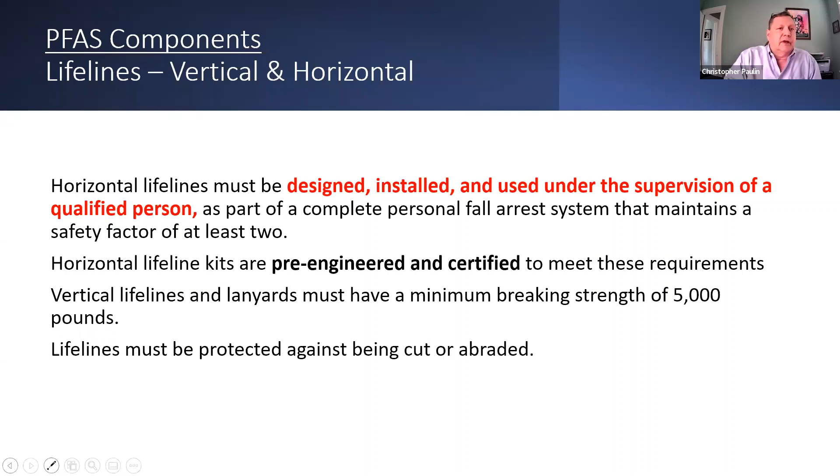For example, horizontal lifelines must be designed, installed, and used under the supervision of a qualified person - not a competent person. That means the person that does it has to be able to do the math to make sure it will resist the forces of impact if 2 guys hit the line at the same time or 3 guys hit the line at the same time. If they all fall off as a group, you've got to count their weight as a group, and if the lifeline is certified for 2, 3, or 4 people, it has to be able to support the weight of all of them combined. The engineer needs to be able to do the math to demonstrate that. So if you've got any questions, we're always available.

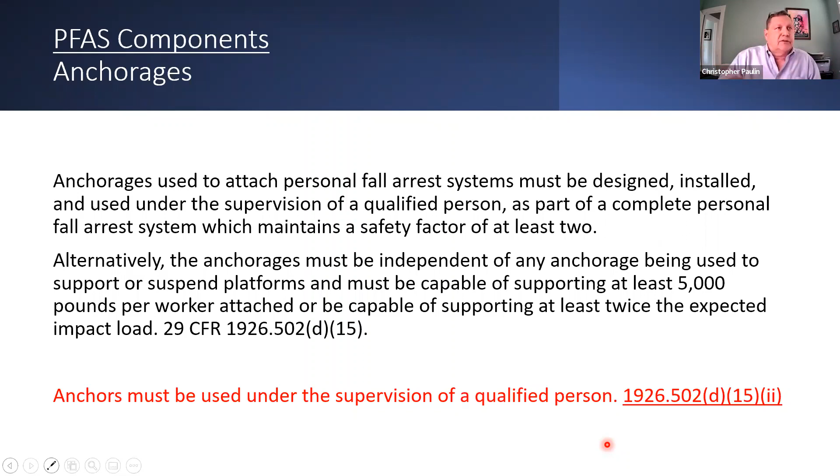Anchors must be used under the supervision of a qualified person. You can't just go connect an anchor to something on a roof. If your competent person does it, not your qualified person, it's called a non-certified anchorage. Logically, it could be fine - you get a choker on an I-beam and it's fine, we all know that. But it's not certified compliant by a qualified person, it's only by a competent person. Therefore it falls into a lesser compliance category.

Other areas require fall protection plans - this is the last thing, I promise. You can use a fall protection plan if you can demonstrate that conventional fall protection systems are not feasible. As a roofer, I can't think of one.

An example would be this: you can't use a harness system because there's no acceptable anchor. There's always an anchor, okay? There's always something to anchor to. It could be a mobile fall prevention cart, but there's always an anchor.

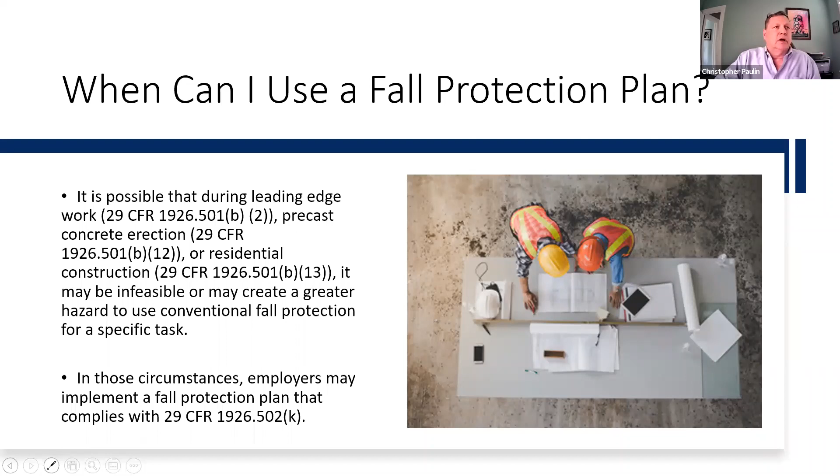An alternative way to work may be to put two people in a man lift and have them do the outside edge from the man lift. So there's always ways to skin the cat, okay? There's a complete publication on this, OSHA publication 3146. I have that available as well. I'll send it to Morgan, and you all can use it as you see fit, but there are elements to a plan.

Anybody got any questions? I think I'm 8 minutes over, 4 minutes over. All right, I would like copies of that program that you did.